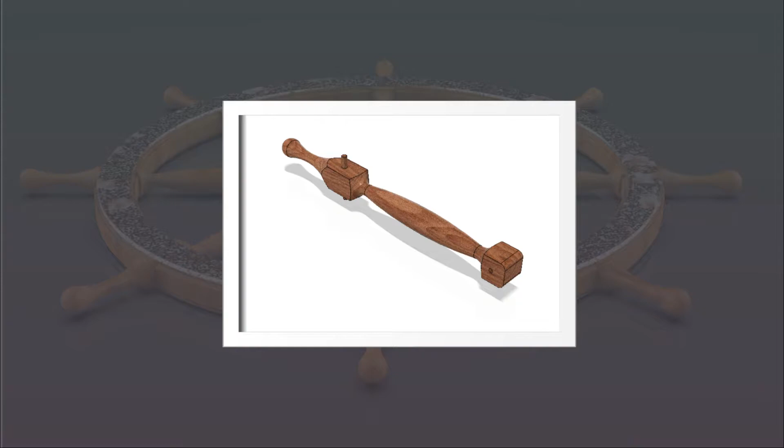If you are here, it means you have completed all of the component models we did in the past for this ship wheel series. The assembly of this project is going to be easy, and I will take it step by step, dividing it into several parts. At the end, this is what we are going to have, as shown on our screen. So let's jump right in.

To begin, we come over to the data panel. Within our project, I'm going to create a new folder and call it assembly. Alright, and I would open this. Okay, cancel.

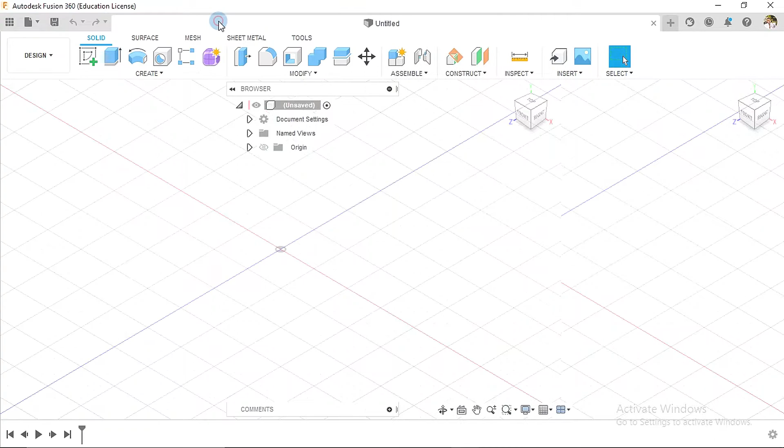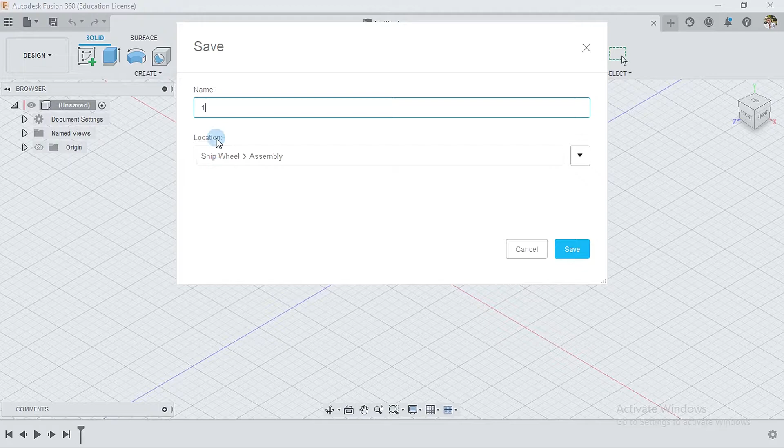Now, to begin an assembly using Fusion 360, there is something you have to do first: you have to have saved your current file. Right now we have Untitled, so we'll save this first. I'll just call it 1 because I don't want to be thinking about the name. Make sure you're saving in the correct directory—you could save in the ship wheel directory, it doesn't matter, but make sure it's saved where you can find it—and say save.

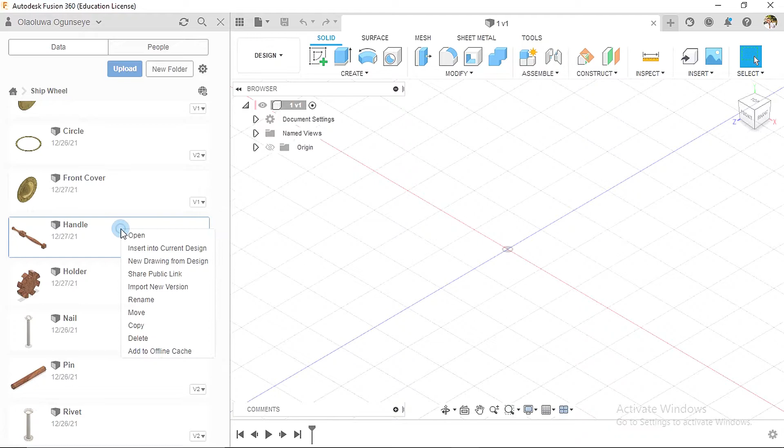So the first thing for us to do now is go over to the data panel, and for this I'll go back to ship wheel and insert my handle. I'll right click and say insert into current design. So we have the handle inserted here. I do not need to change the direction or position of this, so I will simply say OK.

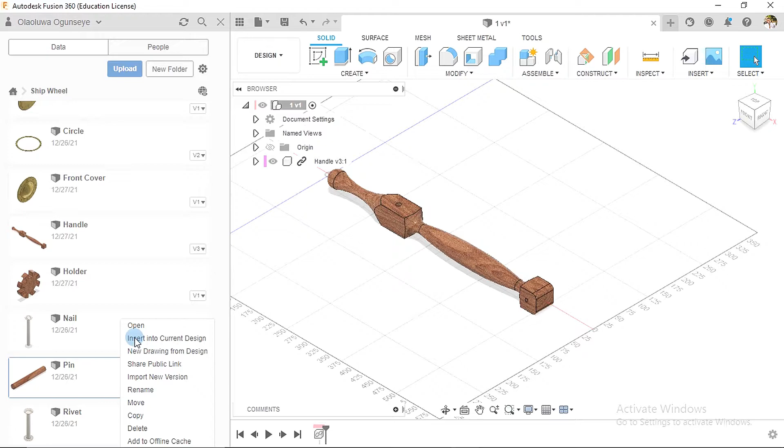I would also go ahead and insert my pin, and say insert into current design. With these two I can say OK. The pin is located here—the location doesn't really matter right now—and I close the data panel.

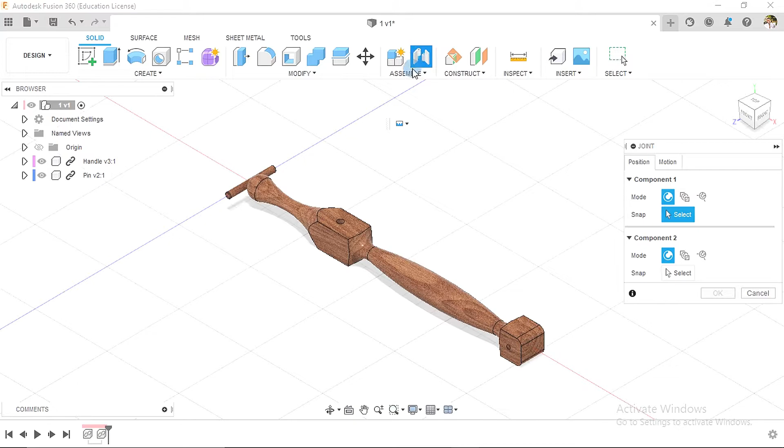The next thing for us to do is place assembly constraints or joints between the pin and the handle. One thing you need to know in Fusion is that the first part you select when creating your joint is going to be the one that moves its position. So what we do is go to assemble, joint, and then click on or rotate my screen.

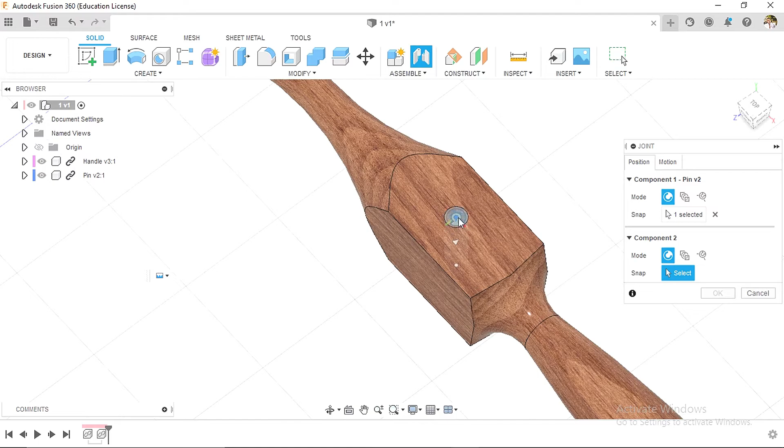What I want is to find the center point of this cylindrical surface for our pin. When I select this, I also need to select the center point for the hole located here. So now, the hole I'm trying to select for the handle—if we go to inspect and section analysis using this face—is going to be this hole here, and the position is going to be at the center point of this hole.

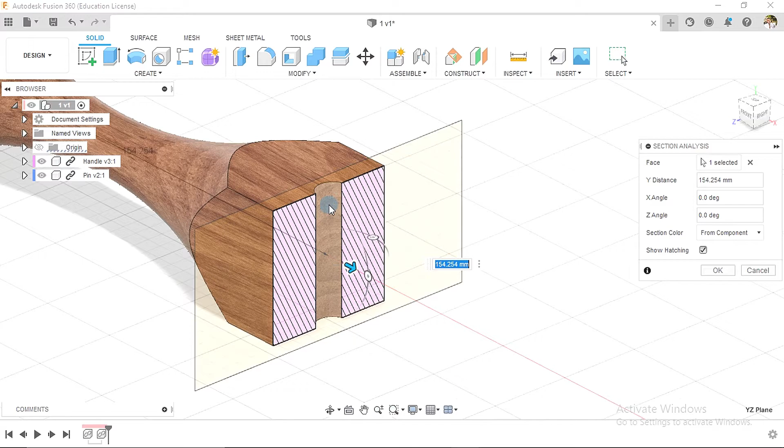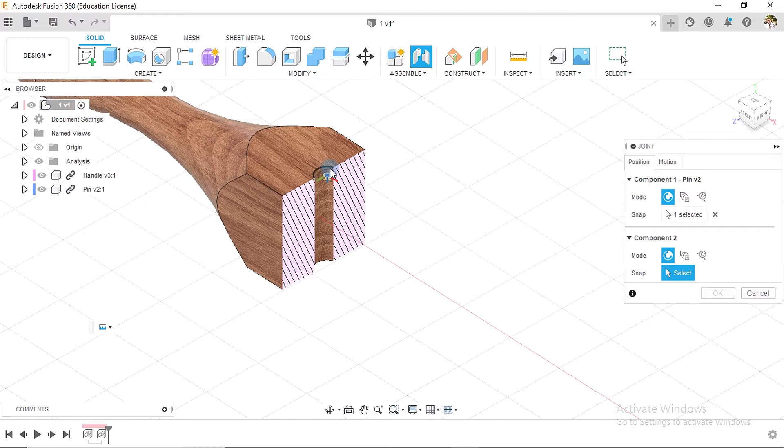So if I say OK—which is not necessary to use this method—I go over to joint and just repeat what I did previously. I select the center point of this surface, then I come over here, select this surface, and select the center point.

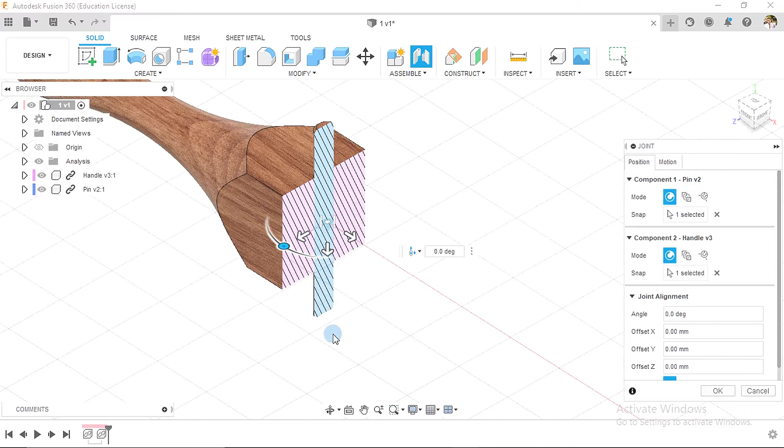So now what we're doing is applying the constraint between the center point of the pin and the center point of the handle. We could leave it as rigid, but I would make it cylindrical, because that is what it is in reality—meaning it's allowed to move up and down—and I would say OK.

Now we have this. I go to my analysis where I created this section from, and I can switch this off—this is what we have.

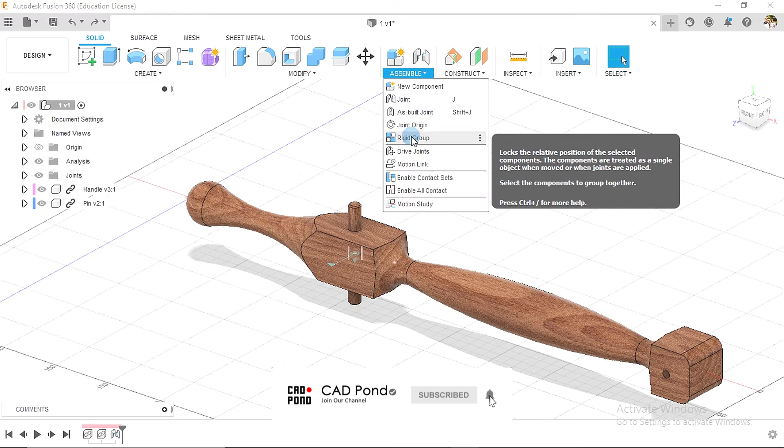What we want to do now is make them fixed together. So I go over to assemble and say rigid group, which means that wherever this part goes as we proceed in the assembly process, this also follows. I would select components 1 and 2. We already have a cylindrical constraint, so we want it included—yes—and I would say OK.

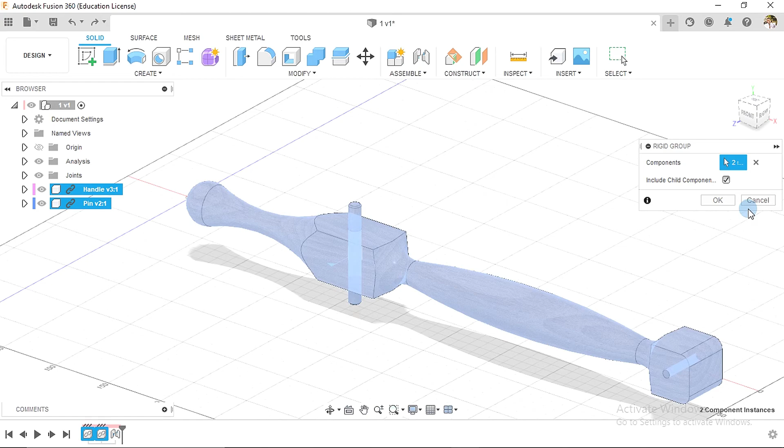Now this is done. The next thing for us to do will be to save this part, and I'll catch you in the next one.